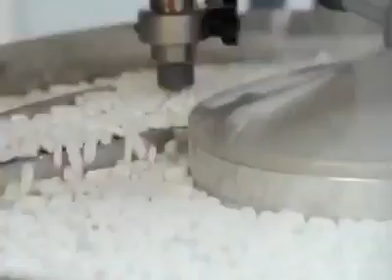Besides, aviation demand of the Philippines will increase in the future with economic development of the Philippines and government's investment on tourism infrastructure. However, the growing demand for aviation on Mactan Cebu International Airport already exceeded the airport's capacity. It is clear that lack of capability to manage increasing demand for Mactan Cebu International Airport is inevitable, thereby being a critical barrier to the development of tourism of the Cebu area.

In this sense, in 2006, the Philippines government conducted a master plan targeting all of the airports in the Philippines. However, in the rapidly changing economic environment and social condition, it is required to address a new master plan for Mactan Cebu International Airport. Following that, the Philippines government requested KOICA to conduct a feasibility study on a new passenger terminal.

So KOICA organized a project team consisting of Incheon International Airport Corporation, POSCO Engineering, Korea Transport Institute, and Kunjung Architects, which have world-class know-how and cutting-edge technology in each field. That project, performed from September 2010 to December 2011, suggested long-term strategies for lasting development of Mactan Cebu International Airport.

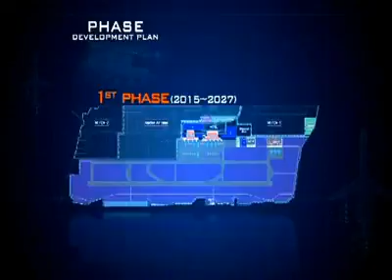Most of all, the airport renovation project's phases consist of the following 3 steps. In Phase 1, after constructing a new international passenger terminal, the existing passenger terminal will be transferred to the domestic passenger terminal. In Phase 2, there will be extension work for the new passenger terminal and the existing passenger terminal. Multiple runways will start operating.

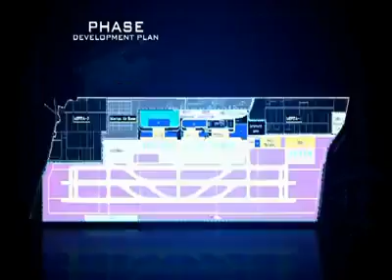In Phase 3, there will be a plan to construct a new international passenger terminal and build an extension to additional facilities as the key tasks to handle aviation demand. In the last phase, it will handle up to 10 million passengers of the domestic terminal and up to 4 million international passengers. How to select sites for the new passenger terminal and arrange the runway is the most important factor in establishing alternatives for the master plan.

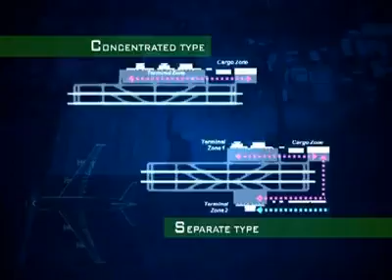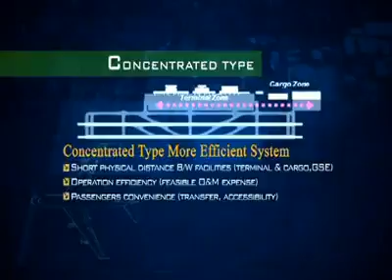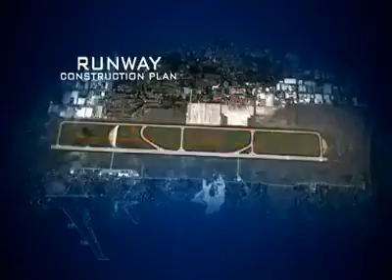Concentrated terminal layout and separated terminal layout were reviewed for the new passenger terminal location. Finally, the concentrated terminal layout was selected because of its advantages: short physical distance between facilities, low need for extra land purchase, and high operational efficiency. The plan to arrange runways followed ways to meet ICAO standards and to minimize extra land extension by rearranging within the current airport area.

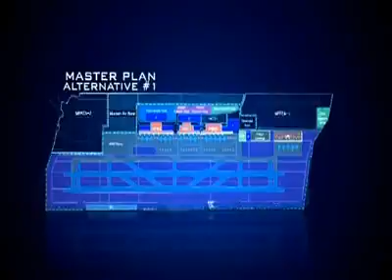We considered 6 alternatives for the new passenger terminal location and runway layout. As a result, Alternative 1, featuring both a concentrated terminal arrangement and a runway system which maximizes use of the existing airport area, was selected for implementing the final phase among possible alternatives.

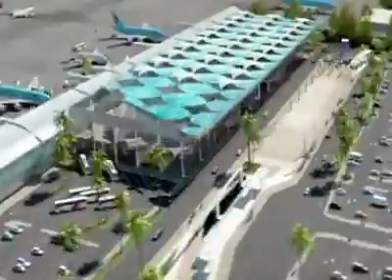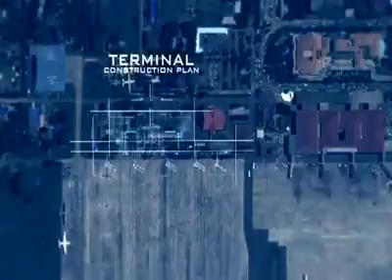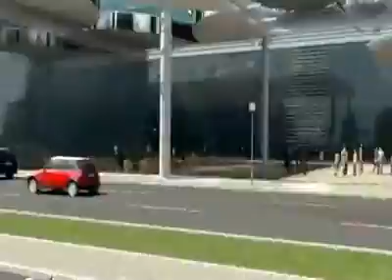Future landmark of Cebu, Mactan Cebu International Airport. The new terminal is to be built in the area next to the international terminal site in Phase 2. In Phase 1, it will support a maximum of 3 million passengers. In Phase 2, up to 4.5 million passengers will be handled with expansion. Especially by introducing the concept of an Airport Plaza, it will accommodate not only commercial spaces but also waiting spaces, thereby improving customers' convenience and generating economic profits.

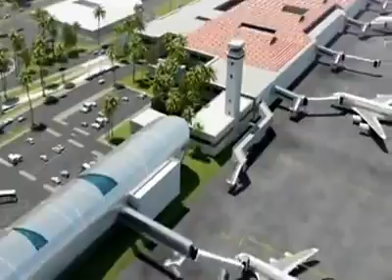The main image of the building is motivated by Cebu's gorgeous and impressive landscape. It pursues both a modern trend with metallic materials and traditional and local images of Cebu. Furthermore, the buildings were designed with the curtain wall construction method to maximize visual openness and energy efficiency for visible convenience and eco-friendliness.

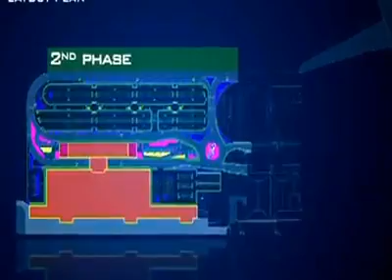Also, the apron and international passenger terminal will have a total of 13 gates in Phase 1. Finally, a total of 20 gates will be located. The curbside is going to be separated into departure and arrival curbsides for securing smooth flow of pedestrians and traffic. It will have a hotel and resort limousine parking area, considering the tourism-specific image of Mactan Cebu International Airport.

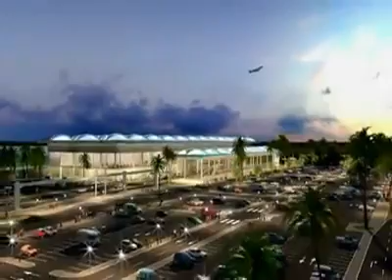Now, Mactan Cebu International Airport will lead as a representative airport in Asia by conducting the newly introduced master plan and new international passenger terminal.

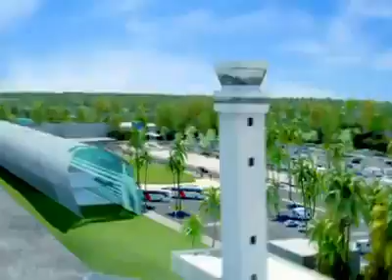A new history of the aviation industry in the Philippines begins now. A representative tourism airport in Asia. An advanced future airport providing world-class services. Tomorrow of Mactan Cebu International Airport starts here. Major airport hub in Asia Pacific, Mactan Cebu International Airport.